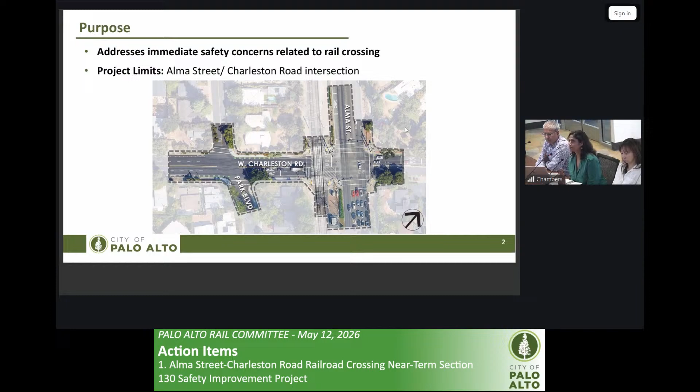To give some background, this project was initiated by the California Public Utilities Commission, CPUC. It was identified as one of the locations where safety improvements were needed, looking at all the different data they have on traffic speed and volume, fatality conditions, and the analysis done by the FRA, the Federal Railroad Administration. It's a program that supports the elimination of hazards at all grade rail crossings throughout the country.

This project involves different stakeholders: Caltrain, the JPB, which operates the Caltrain system in Palo Alto and the peninsula, and Caltrans as our funding partner. The funds are obligated through the State Department of Transportation in California and the City of Palo Alto. This project is limited to the guidelines and requirements proposed by the CPUC.

We have a short timeline of how we started the project - we received the PID, the project initiation documents, from CPUC in January 2023, and we had our Palo Alto Bike Advisory Committee meeting last month, April of 2026. Next slide, please.

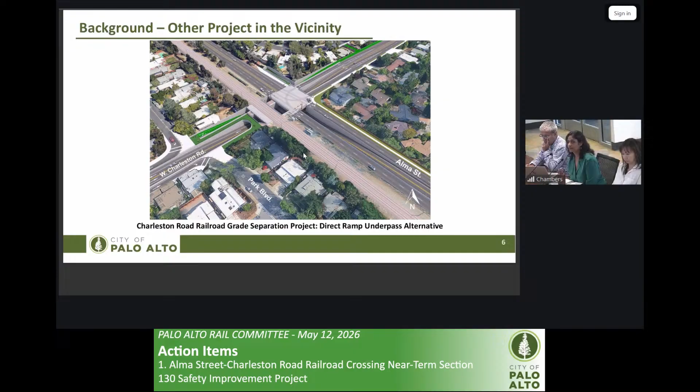This is the proposed direction right now from the City Council and Rail Committee that staff is pursuing further.

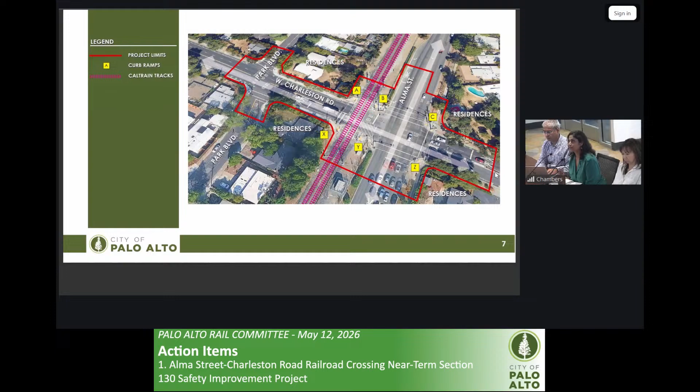In the rush to start the project, I failed to acknowledge my teammates here, Marie Mai from Kimley-Horn Associates, who will be presenting the next few slides on the preliminary concept designs and next steps. We also have Jason E. from BKF Engineers and Rafael Reyes, Senior Engineer from City of Palo Alto Public Works Department. I'll hand it over to Marie.

Thank you, Rishika. Good afternoon, council members. I will be presenting over the next few slides details of the proposed improvements.

So the changes near Park Boulevard are pretty subtle. They include the addition of green bike lane markings at the bike lane entrances to improve awareness of cyclists by motorists. They also include the addition of traffic delineators similar to the existing flexible posts in the median curb.

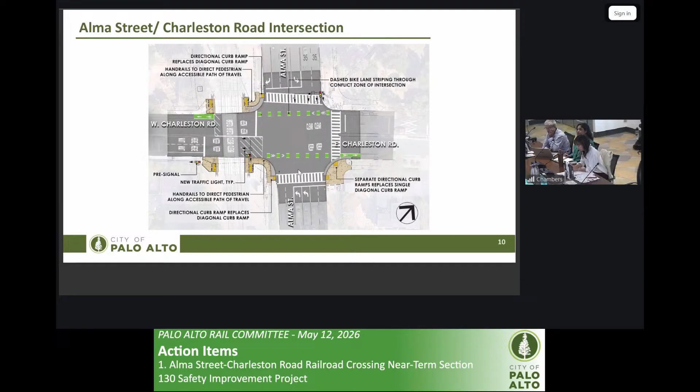I'd like to zoom into the intersection of Charleston Road and the railroad tracks and Alma Street. This slide shows the conceptual plan and summarizes the proposed pedestrian, bicycle, and rail crossing safety improvements.

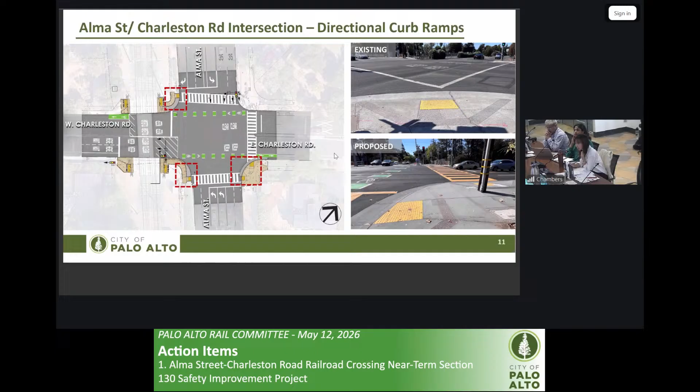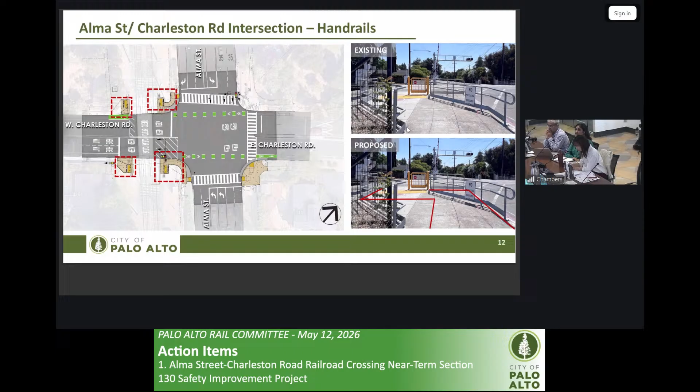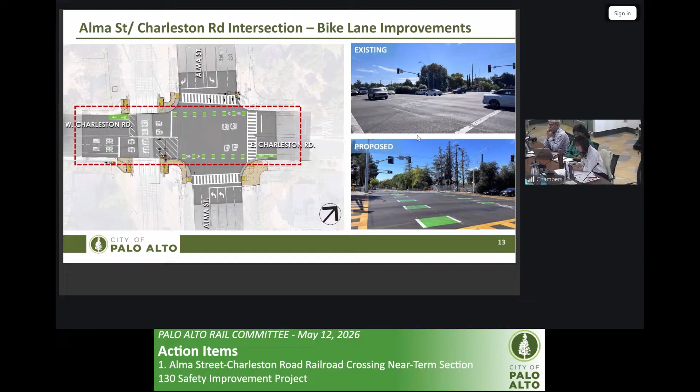There are existing green striped bike lanes along Charleston Road, but they do not currently extend through the intersection, as you can see in the upper photo. The design proposes new dashed green bike lane striping through the Alma Street intersection to make cyclists more visible to motorists in that conflict zone. The bottom photo shows an example of what the dashed green markings would look like, taken from the Churchill-Alma intersection.

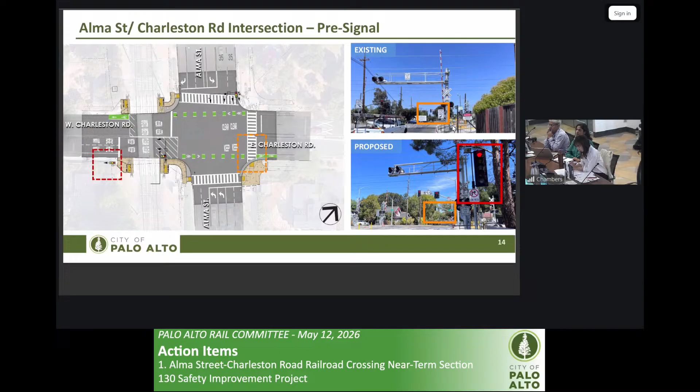The pre-signal is coordinated with the main roadway signal and installed before the railroad tracks, in this case for eastbound Charleston drivers. It improves safety by preventing vehicles from being stranded on the tracks, ensuring that vehicles approaching the rail crossing have adequate time to clear them.

Under normal circumstances, when there are no trains approaching, the signals operate together and show the same signal. So if the traffic signal shows green, the pre-signal, boxed in red, would also show green. The railroad crossing signal, boxed in orange, stays unlit and the gate arms stay in the upright position.

However, when a train approaches, the two signals operate separately. The pre-signal will show red so that motorists approaching the tracks can slow down and stop, and the railroad crossing signal will flash red with the gate arms coming down. The traffic signal would operate separately by showing green, allowing motorists already in the intersection, or too close to safely stop behind the gate arms, to continue through and exit. The intent is to keep the area by the tracks clear of vehicles.

With the addition of the pre-signal, right turns on red will be restricted because there is no current right-turn-only lane. Motorists who want to turn right currently have to wait for a green signal anyway if they are behind a car wanting to go straight, so the delay from the right turn restrictions may not be significant.

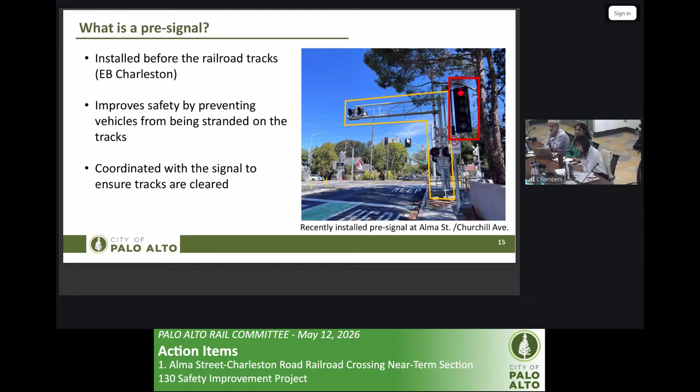As Ruchika mentioned, a number of key tasks and meetings related to project funding and design development have already been completed. The next steps, shown in the dark green boxes, include today's rail committee meeting and a city school traffic safety committee meeting scheduled for next week. These would be followed by city council approval of the design plans by mid-year, development of construction drawings later in the year, and a construction start in 2027.

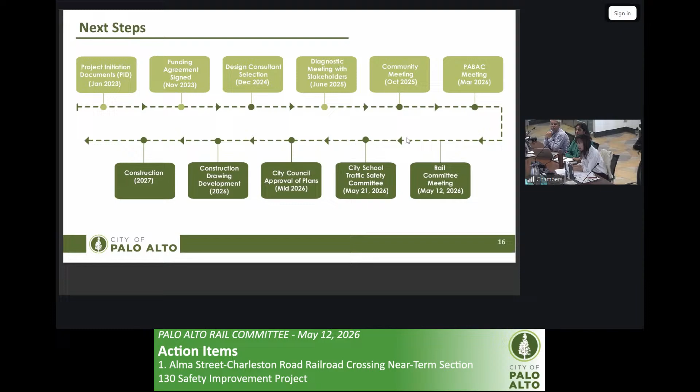That concludes our slideshow presentation. We'd be happy to receive and answer any questions.

Thank you. Shall we go to the public first? Okay, any speakers? If any member of the public would like to speak on item 1, please raise your hand or press star 9 now. We have no request to speak. Okay.

John Melnichuk: With this proposed improvement to Charleston and Alma, which is long overdue, is it duplicative, and will it be wiped out or wasted, expenditures wasted, on the basis of installing quiet zones? That's my first question. And it looks good. We welcome any safety improvements at that intersection, which is very near to my home.

Thank you, colleagues. Julie? Thank you. Yes, Pat, I'll pick up the commenter's question in a way.

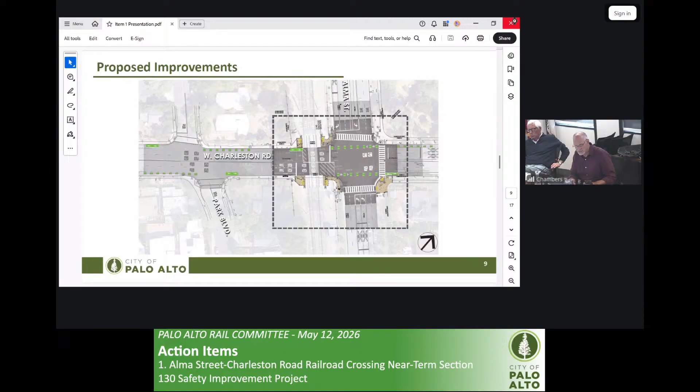Okay, then I want to talk on slide 9, if we can call that up. And the improvements at Park Crossing Charleston - basically we have some improvements on what we'll call east-west bike traffic. But we have a real problem crossing at both Meadow and Charleston, crossing the arterial on bikes going north-south. This doesn't address that at all. Maybe it's outside the scope of this, but is staff looking at that issue? Because it's really a significant problem on our whole park bike boulevard.

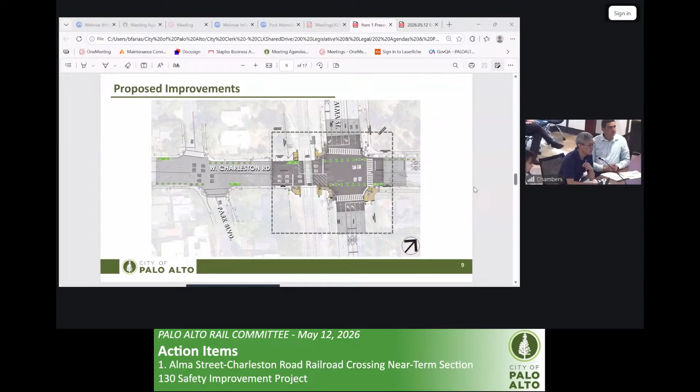Oh, I see we have a staff member who may be able to help us on that. Hello, Council, I'm Jason Yee with BKF Engineers, I helped design the plans. Your comment about Park Boulevard crossing in the north-south direction - with this project specifically, the Section 130 funding is looking to remove queues that may impact the railroad. A crossing so close to the rail could produce similar results to what we've seen before, which is if a bicycle or pedestrian is crossing nearby, that could actually cause a delay in people exiting the tracks.

For example, if you have a large group of bicyclists traveling on Park Boulevard crossing, that could stop traffic in the westbound direction and potentially back up traffic into the crossing. So for that reason, we were sensitive in the design of this. I'll mention though, these were the conceptuals we had. There is a dashed green bike lane through Park Boulevard in the final design to help assist in the east-west direction. Oh, good. Yeah, I was less concerned about the car backup and more concerned about the bike riders, but both matter.

And my recollection is that our bike and pedestrian master plan does address that issue, but I only have a vague recollection of that. It looks like my vague recollection may be the highest at the table. Okay, all right.

And just from a nomenclature standpoint, I've been trying to push this at Caltrain: we don't have good nomenclature. What I think should be is we call safety improvements those that are trying to address accidental risks, and security those that are trying to address deliberate risks. Of course you could argue security is a subset of safety, but we just haven't had nomenclature that says what are we trying to solve here - is it cars and people doing things accidentally, or are we trying to prevent intrusions into the right-of-way to prevent self-harm? If anybody's got good ideas on that, I think there's a need for clear communication on a term everybody understands for which problem we're trying to solve.

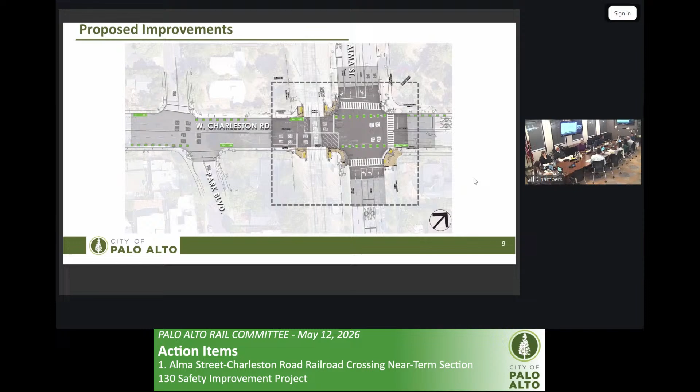I can respond to your previous comment. This is Ria Hutabarat Lo, Chief Transportation Officer. In terms of the bicycle crossing, staff is planning on providing wayfinding at the corner of Park and Mackay, just a little bit upstream. The idea is to encourage cyclists to cross Charleston at Wilkie Way instead of Park Boulevard, and I think that will help alleviate this concern, given the closeness to the crossing. Great, and that seems logical given they end up on Wilkie to get further south. Meadow, which isn't part of our discussion, doesn't have as good an alternative street route, but I'll leave that for another day.

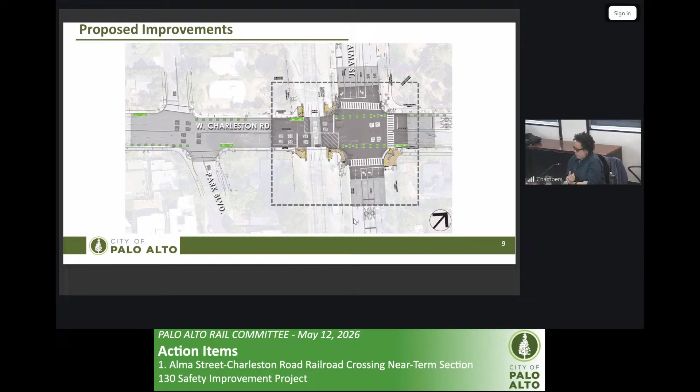Okay, Julie? Yeah, one more thing. Thank you. I know Meadow isn't part of our discussion, and yet if we are going to be contemplating similar improvements at Meadow, the potential vehicular traffic backup there I think might be worse. I don't have the charts memorized, I'm sure Nadia does, but the difference with Meadow is it ends up T-junctioning onto this strange thing on the west side called El Camino Way, which is particularly, on the southern end during school commute time, an incredibly fraught road. The road is one lane with on-street parking, one lane for traffic in each direction, and the bikes are meant to share the road. So I worry about that piece being backed up potentially onto El Camino.

And in this new scenario where cars are really not allowed to advance, one or two at a time with every train signal coming - well, and that issue of signal optimization, whether the new capability hopefully of AI empowerment, even preceding that, Caltrain has had an issue, and I'm not sure they've really optimized it yet, of when gates go down, how long it takes for the whole pattern to recover to normal. During that period cars aren't flowing through in the most optimum way. So I think whether or not we get this AI empowerment, we should really be seeing if Caltrain can support better signal optimization, basically at the Alma and Charleston signal.

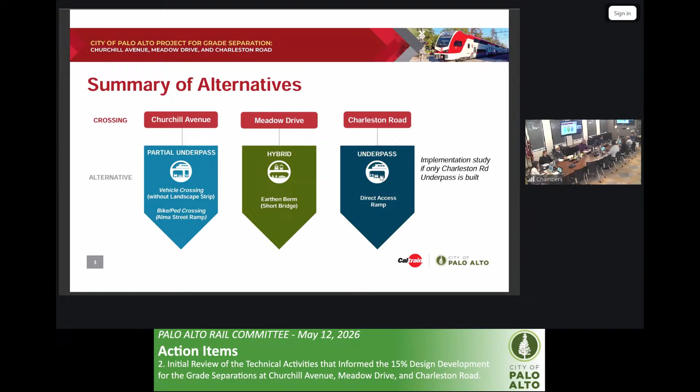I'm going to continue with the summary - recapping quickly where we've been and where we're going. Over the last year, the project developed multiple concepts, several alternatives at each crossing, and at the end of last year, City Council selected one alternative per crossing to further develop into 15% design.

So we are halfway through this 15% design development. Today we're going to give you an update of where we are. Then in September, we're going to present an updated 15% design here to the Rail Committee and also to City Council to receive concurrence to carry forward into the 35% plan development and environmental clearance phase. That 35% phase will run from October 2026 roughly to the end of 2027, where we'll be developing and advancing that 35% design and environmental clearance.

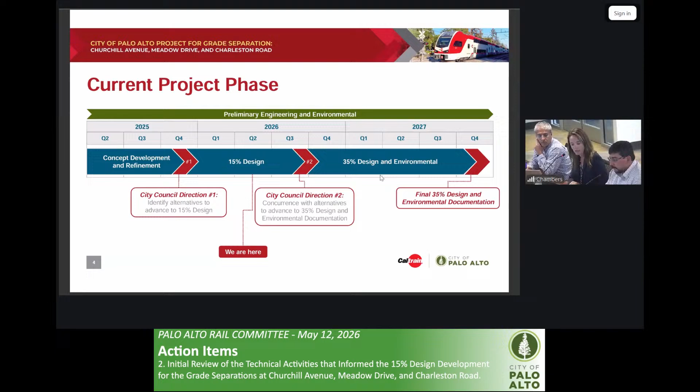Before we launch into our design update, I wanted to summarize what's important: the focus and difference between the 15% design phase and the 35% design and environmental phase. Really the goal for 15% is to establish a feasible, buildable project concept with a defined footprint, which we're going to talk about in the next slide, to inform the environmental studies in the next phase and get an understanding of a preliminary cost and schedule, which Edgar is going to talk about.

It includes updated concepts, layouts, typical sections. If you think about a roadway and you take a knife and slice it down, you would understand the lane configuration, where the shoulders are, and the typical cross section. You will understand key risks and also preliminary cost estimates. The final deliverables would include a basis of design, which is really a summary of the criteria, codes, and standards that would be used for advancing the design.

The 35% design phase is about advancing the design, confirming more details on the track and roadway geometry, the type of structures to be used, a better understanding of risks and constructability, in order to complete the environmental documentation. The deliverables are that 35% design plan set, the environmental documentation, and a refined project cost estimate and schedule.

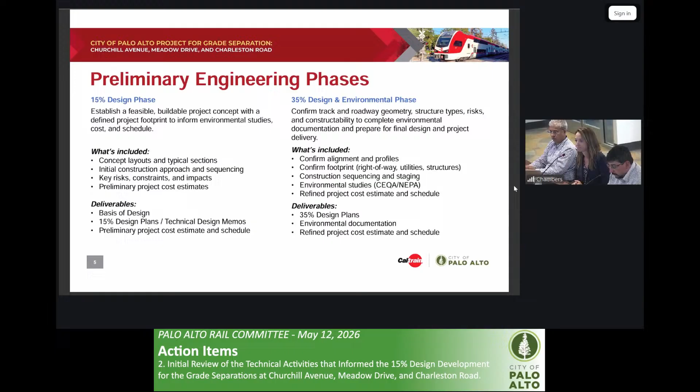As I mentioned, the goal of this 15% design phase, which we've talked about here at the Rail Committee, is establishing a stable project footprint. The project footprint not only consists of the permanent improvements - the bridges, roadways, utilities - but also the temporary space needed to construct the improvements: the shoofly tracks, which Edgar is going to talk about, which are the temporary tracks needed to keep the trains moving during construction, the staging and laydown areas, and the work zones.

When we say stable, what we mean is a high level of confidence that the overall footprint is not going to expand - it's the area we're working within. After this 15% design phase is complete, that's our maximum footprint to work within during the environmental period as we're analyzing potential environmental impacts. Concurrent to these environmental technical studies, we'll be advancing that 35% design. Hopefully that helps set the framework of the 15% design goal of advancing that stable footprint.

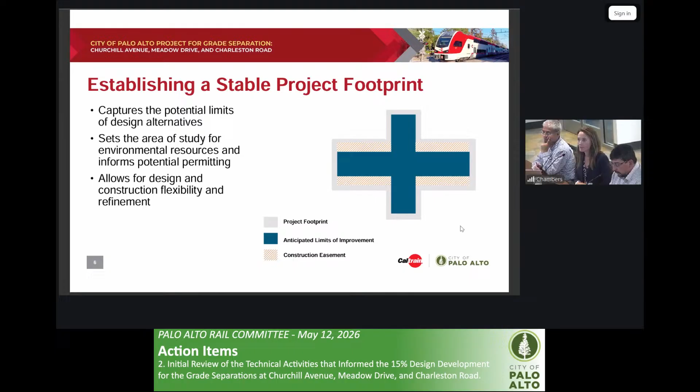Final slide for me to tee up Edgar in terms of the key design elements we're going to cover today, which the team has been exploring to ultimately get to that footprint: roadway, track, the right-of-way, the utilities, the structural components, and the construction considerations that Edgar's going to talk about. Edgar's going to speak to all six of these key design elements.

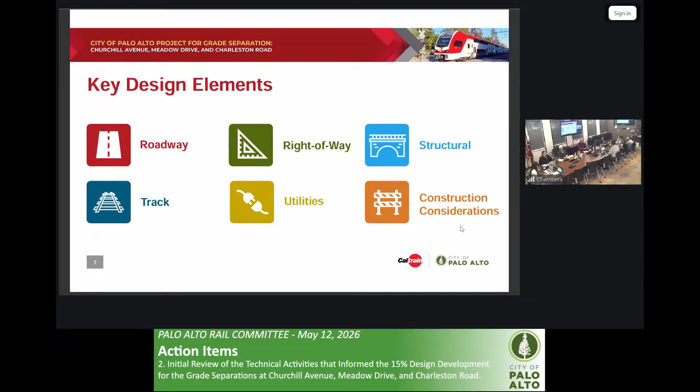Thanks, Jill. Good afternoon, Rail Committee. Let's dive right in, as we've been doing quite a bit of work as part of this 15% design effort to better understand how the design is advanced, how it relates to constructability, and the implications to roadway operations, railroad operations, and the community at large. The first topic is with regards to roadway and drainage.

This is a lot of what people experience on a day-to-day, but the drainage is because when it rains, you do not want that impacting your roadways, whether it's a lowered roadway and avoiding flooding conditions, or simply the ability to travel safely along the roadway because you're trying to clear that water out.

As part of the 15% design drawings, we have started the detailed evaluation of how the water is going to be conveyed from these low points, how to bring them up to a conforming grade, or get back up to a specific elevation to tie to existing storm drainage systems, to then be conveyed to the creeks at either side of these crossings, Matadero Creek and Adobe Creek.

Because all three roadways are being lowered, Churchill, Charleston, and Meadow, there is a need to bring that water up. Water will go to its lowest point and find that space very quickly, so we need to be able to pump that out and get it into the piping system. This is the first stormwater report detailing out that preliminary design to understand how far the stormwater improvements will need to occur for the project at each of the three locations.

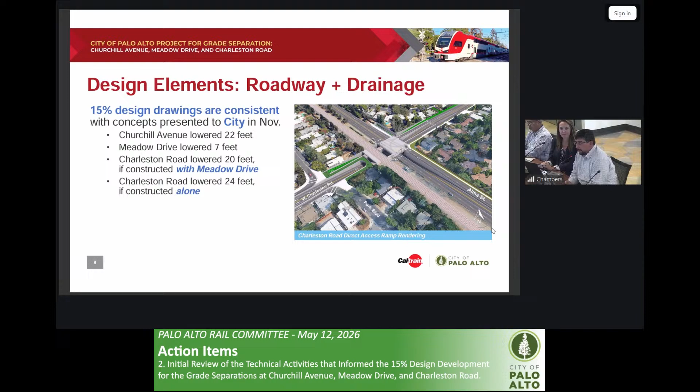With regards to the roadway, as part of the concept refinement, we had done turning movement analysis to test not only fire trucks, but some truck movements as well as trash collection. We did a thorough analysis to confirm that not only local vehicles can make the turning movements, but also at every location we can handle a garbage truck, fire truck, and what we call a standard bus, a 40-foot bus, as well as what's known as a wheelbase 40-foot truck. This allows for larger deliveries, moving trucks, Home Depot deliveries, or materials deliveries that tend to be in larger vehicles, and shows how those vehicles would be able to maneuver through each of the crossings.

There are some limitations, specifically at Charleston Road with regards to the direct access ramp. The predominant movement for the direct access ramp is private vehicles going from the west of the tracks to the south of Charleston, where a great deal of development is already occurring in South Palo Alto. So that direct access ramp is mostly handling local traffic, and we believe there can be a limitation on the 3-axle semi-trailer at the direct access ramp. There are many options for trucks to go onto Charleston, whether it's El Camino to the west or Middlefield to the east, so there are options available for heavier truck traffic if necessary.

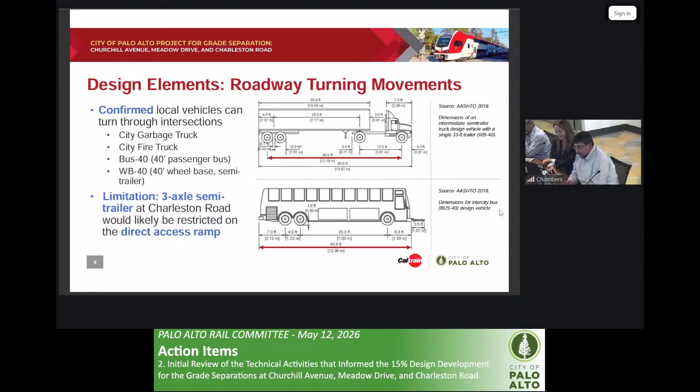With regards to the right-of-way, we have some refinement associated with the right-of-way. I'll come back to the topic of utilities and where potential utility corridors may be. We have seen, at least at Churchill and Meadow, that the 15% design confirms the previous list of potential property impacts and potential acquisitions. With regards to Charleston Road, there have been 2 parcels that were removed from the list based on the 15% design due to potential reconfiguration of the bike ped facilities and the utilities.

The list of potential properties will continue to be refined throughout design. As more detailed utility design occurs, we'll be able to increase or improve the confidence level with regards to the list of potential property impacts.

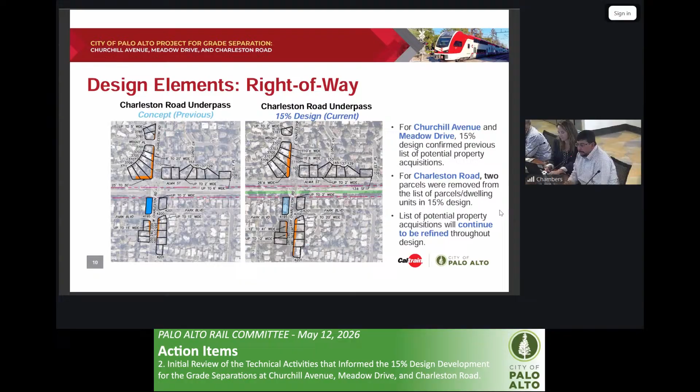And that's the key with regards to the environmental documentation process, it's effectively a disclosure process. So this is, as part of the due diligence, being able to disclose here are the potential property impacts. Next slide.

With regards to structural and geotechnical, at Churchill Avenue at the partial underpass, the roadway is lowered within a concrete box underneath the tracks with cantilevered retaining walls approaching it. I'll get more into detail as to the methodology, but this is where that box is essentially jacked or slid underneath the tracks.

The example on the right is what the box could look like for the Seale Avenue underpass. In this case, the tunnel extends into Peers Park to reduce excessive retaining of soils. It's pushed through from most likely the park side, and that box is then able to be stable underneath the tracks and supported by retaining walls on either side.

I'll get more into the construction method here shortly in terms of the box jacking, but thanks to preliminary geotechnical information, not only what was previously done by the city, we have done additional cores out there and confirmed, at least for 15% design, the bearing strength of the soil, which led to preliminary structural plans. As the project proceeds into later phases, more cores will be necessary. That's because when you're ready to construct, you want to make sure you have precise data for wherever there's going to be any foundation so that you can confirm the design and that there's enough bearing strength at that particular location.

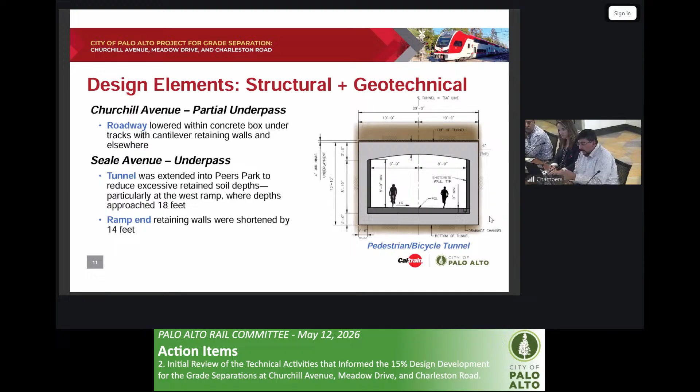So basically the soils confirm that box jacking is possible at this level of design. That is accurate. Now, as to the support of excavation or support of the jacking, those are refinements that will occur as we get more cores at those specific locations.

With regards to utilities, we've done desktop research to identify the major utilities, some of it confirming previous work and others new items that were identified. Further investigation is needed. As part of that desktop research, we also had the owners of the utilities come out and confirm through their mapping where their utilities are. They did not mark them out - that's going to be a subsequent phase. But we have received record drawings from the utility owners, vis-a-vis the city, PG&E, and other fiber communication companies, to be able to confirm what they believe are assets in this area.

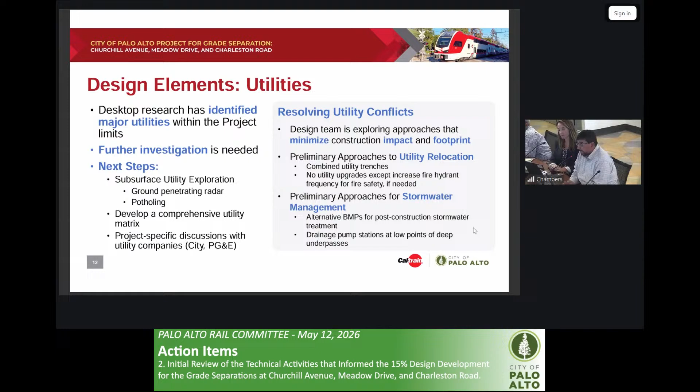At Churchill Avenue, there are no modifications to the track. This is thanks to the working assumption that the improvements will be done through box jacking at that location.

Charleston Road, if delivered on its own—in other words, if there's only sufficient funding for one crossing and Charleston Road is that one crossing—then the recommendation would be to do no modifications to the track and box jack underneath those existing tracks.

If there is sufficient funding, and we'll get a little more into the delivery scenarios, but if there's sufficient funding for Meadow and Charleston Road to occur effectively at the same time, then there's an opportunity to raise the tracks at Charleston Road. This can help alleviate some of the challenges at Meadow and the constructability at Meadow. It raises at Meadow 16 feet, and due to the Meadow Drive track raise, it can increase Charleston Road up to 4.5 feet.

The tracks would be set on bridges over the roadway crossing or a box. We're looking at both options, and I'll explain why there's the opportunity for either—and then embankment with retaining walls for Meadow, which we had presented to the rail committee at previous meetings.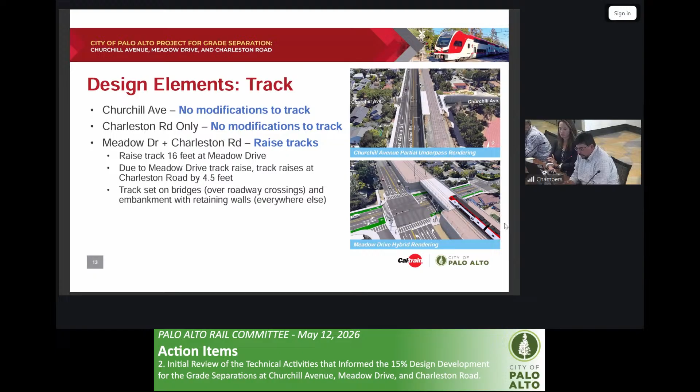Next slide. There was a question at the last meeting about how the track curves would work. There's the ability to move the tracks up, which requires what we call vertical curves—the smooth transition of the train into a new grade. We also have the need for horizontal curves to either create additional space or provide sufficient space for construction.

Those two curve types, horizontal and vertical, should not coincide or overlap. Here in the exhibit on screen, we show at least where the track improvements could occur, and how the vertical curves in orange and the horizontal curves are effectively staggered to provide the space necessary for the tracks to create additional space and then move vertically.

You can see how that translates into the profile itself. Wherever you see green, there's usually a horizontal curve. Where you see orange in the center, you go straight down—that's the bracket for the vertical curve transitioning from one grade to another. We wanted to share with the rail committee how that design came about to get to steeper grades where possible.

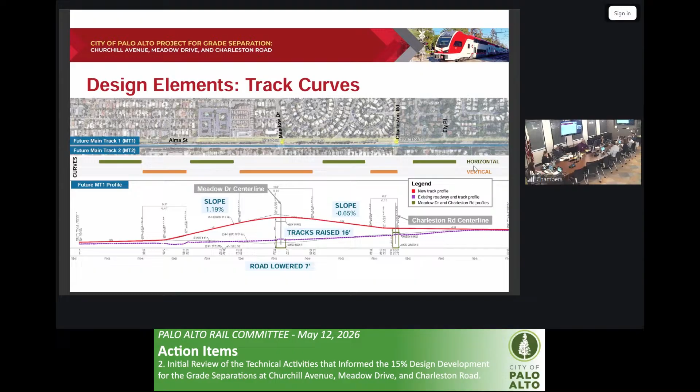To constructability and construction sequence: the construction sequencing is intended to help support and identify the community impacts as part of major construction phases. These things don't happen immediately. It's being able to have deliberate thought as to the space required, the amount of time required, how a contractor is able to mobilize equipment in and out, and materials in and out of the space, to be able to build a set of improvements.

The construction sequencing as part of 15% design will serve as our baseline in informing the environmental document. It is not the construction sequence—it is intended to be a feasible construction sequence to understand those environmental considerations for the environmental document.

The city and Caltrain do have a constructability workshop this month. We continue to work and explore the key constraints associated with the construction sequencing—how each phase of the work could occur, what are going to be the challenges with those phases, and what does that mean in terms of the user experience.

In other words, your cyclists, your schools—Meadow and Charleston being key corridors for school access. So being able to identify for each user what can happen and how to be able to do so safely, because we're talking about major construction equipment, large pieces of materials, and in some cases large girders to be able to install for the future bridge construction.

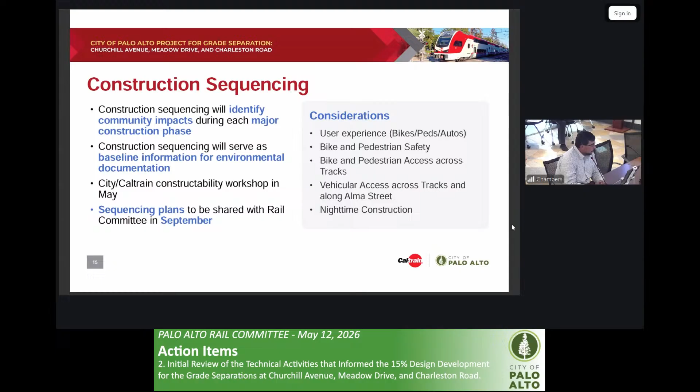There are homes adjacent to these potential construction sites, so nighttime construction is something that is going to be better understood, to be able to say what can and cannot occur at night, to reduce potential noise-generating activities. Next slide.

Let's dive into track shoofly. The best way I can describe it is that it's a track bypass—a potential or temporary track constructed around a potential construction site and work area along an existing track, to be able to build whatever is necessary. In this case, a shoofly is necessary to construct the Meadow hybrid grade separation.

So for the shoofly sequencing, it will allow for reliable and consistent Caltrain operations with larger work windows for the potential contractor, and the opportunity to improve those production rates. When we look at a contractor's space and the amount of time provided, safety is paramount for the rail operations, the neighborhood, and those workers adjacent to the railroad. So those work windows and the ability to provide space are really important—essentially, the more space that's safely provided, the higher those production rates can be.

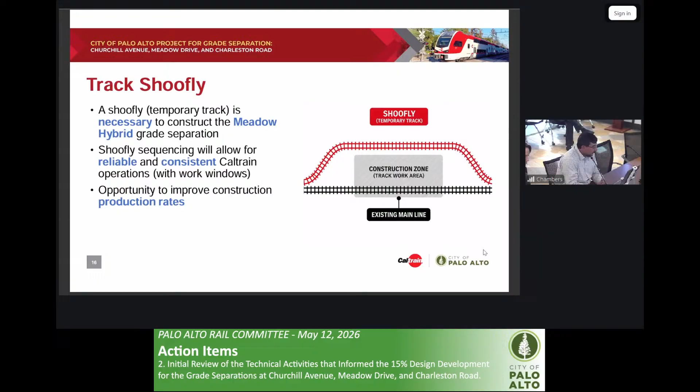So there, we evaluated the shoofly extents for Meadow Drive. And if in this case we wanted to see the larger shoe fly extents, if Meadow and Charleston were to be built at the same time, and see if the shoe fly could be utilized to improve the construction duration for Charleston. So we looked at a shoe fly extent from Green Meadow Way to Loma Verde Avenue, approximately a mile-long shoe fly.

So creating those temporary tracks to one side of the existing tracks. Those existing tracks that are there today are going to be operating with Caltrain trains, so there needs to be some form of separation from those existing tracks to the shoe fly tracks with a temporary barrier and construction fence. The shoe fly tracks could be constructed, then you have the supporting infrastructure for those shoe fly tracks, vis-a-vis the OCS poles and any maintenance assets, and in this case, crossing equipment for Meadow, because Meadow will be open while the shoe fly is in operation.

And so in this case, it shows that there's about 28 feet remaining for Alma after providing the protective barriers for the roadway, the shoe fly, and the existing tracks, as these workers will be in between the tracks and the roadway.

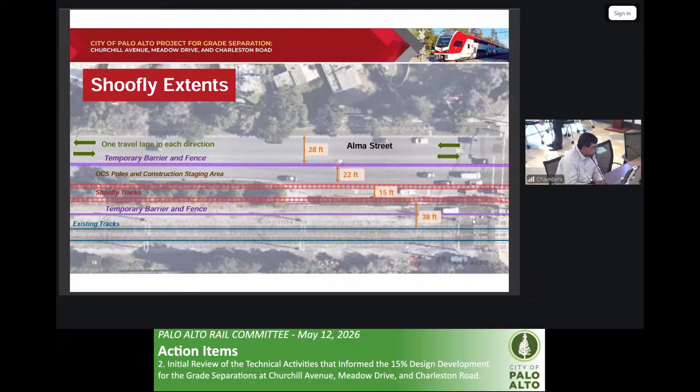Next slide. I think it'd be helpful if you'd say how wide a lane normally is and how much a shoulder is. A typical lane is at least 12 feet, but it can be reduced down to 10. For fire access, the preferred is 14 feet along a stretch. And so this is what we've been able to at least accommodate.

In section, one thing is to be able to see it in plan view from a bird's eye, it's another thing to be able to see it in section. So I'm going to go right to left. The existing tracks are on the right side, then you see the shoe fly tracks in the center, and finally Alma Street on the far left. Then you'll see the sidewalk and the remaining roadway right-of-way to the left of that. The shoofly can extend into Alma Street approximately 23 to 37 feet.

Now, it seems like that's a very wide range. It's because of the jog in the right-of-way and the transition of Alma's right-of-way width between essentially the north and south side of Meadow. So that's the reason why there's a larger extent there.

So this is to show, again, what may seem like a lot of space when you go out at the crossing and look at the railroad. It's actually not as much when you start looking at the ability to construct said tracks. And the east side of Alma has a very wide planting strip, as well as in some cases a buffer even beyond the sidewalk to the back fences.

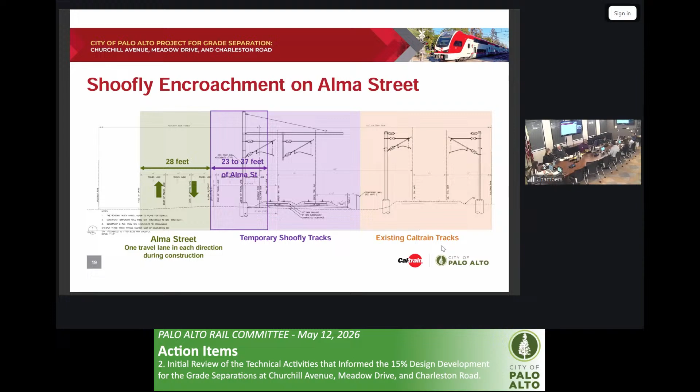Thanks. All right, so that's in section. Next slide. So box jacking. This is applicable to Churchill Avenue, the partial underpass, and then Charleston Road if it were to be constructed with or without Meadow. So there's several scenarios. So what occurs here?

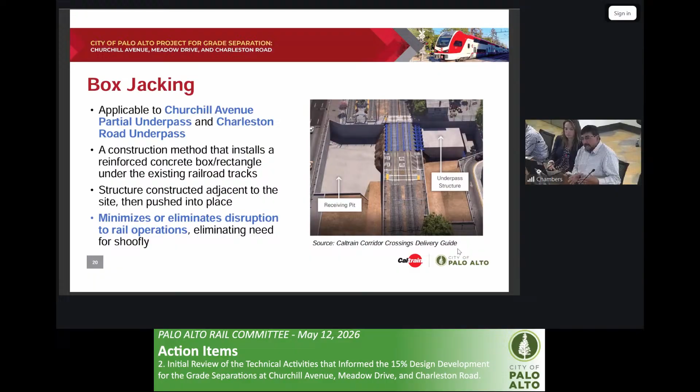There is another jacking method we are exploring, which is what other railroads have done. This type of box jacking isolates the tracks. We're exploring the ability to have some form of shutdown, cut the tracks, dig the hole, and push the entire box with the bridge structure underneath into place. That's been done on Long Island Railroad as part of a handful of pre-planned closures. That's another method we'll be exploring as part of this project.

There are some wonderful time-lapse videos on box jacking on our website that we can link for the public, because until you've seen that, it's hard to envision how this works. In this case, there's a whole box, and the ability to jack not only the box with an open cut, which makes it a little easier and less isolating of the tracks, but also to build essentially a frame of the box with a bridge on top and push that into place. So we are exploring different methods to reduce the construction period at the crossing and improve constructability and construction timelines.

Even though we haven't done any rail jack boxes regionally, VTA has used it on other locations on projects they've done in the county, as our CEO mentioned. Where the tracks are isolated, it minimizes or eliminates the disruption to rail operation, so you can effectively operate on top of the tracks. If a closure is considered, there are other ways to reduce the impacts surrounding that crossing. We are exploring multiple options, including whether it's one large box or two smaller boxes, and starting to delve into those design considerations and details to improve constructability for each crossing.

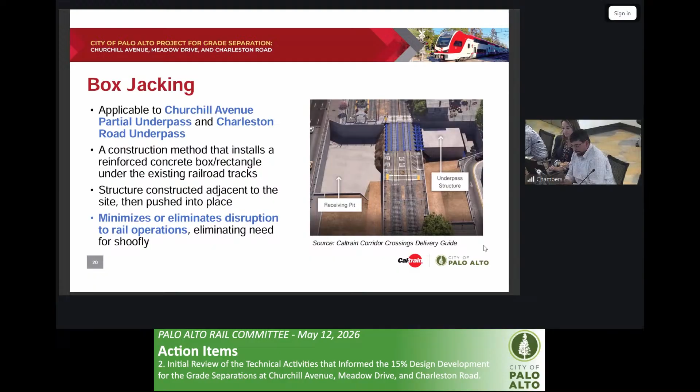So the delivery scenarios. We've talked about a lot of the design elements and constructability, and we'll go into more detail in the coming months with you; this is the first foray into that. For Churchill Avenue, I've mentioned this box jacking, both for the vehicular crossing at Churchill itself and Seale Avenue at Peers Park, the ability to build and push that box through. I didn't get too much into Seale Avenue today, but we will be talking about what it means to potentially push that box further into Alma, maybe doing some open cut there, and some of that sequencing to improve constructability.

Now, Meadow and Charleston — as we've communicated in the past, this is highly dependent on the amount of funding available for the crossings. So we are preparing these scenarios to see how much it would cost to do Charleston on its own, Charleston and Meadow somewhat in sequence at the same time, and then both effectively at the same time, so we can better understand the trade-offs from a cost perspective and present that to the Rail Committee and the City Council. Charleston Road, essentially it's box jacking — from a scenario perspective it's pretty straightforward, and we consider that a good baseline to understand the marginal cost beyond that.

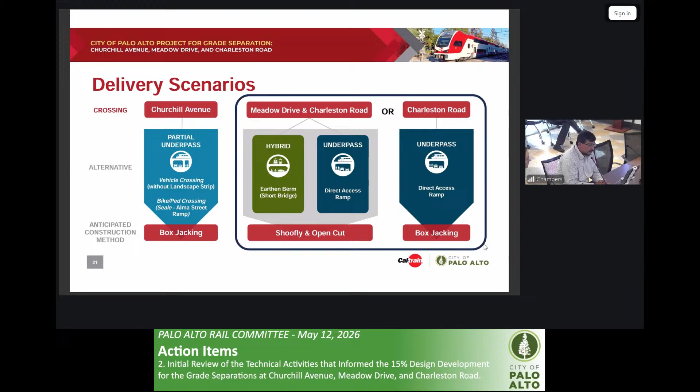Construction techniques for that, what if any diversion of traffic may be necessary? Is shutting down Alma there an option? Unlikely, but we're trying to see how to provide that space to build what is effectively a pretty big bridge, an 80-foot bridge at least. So there's some complex geometry and structural calculations for that particular bridge.

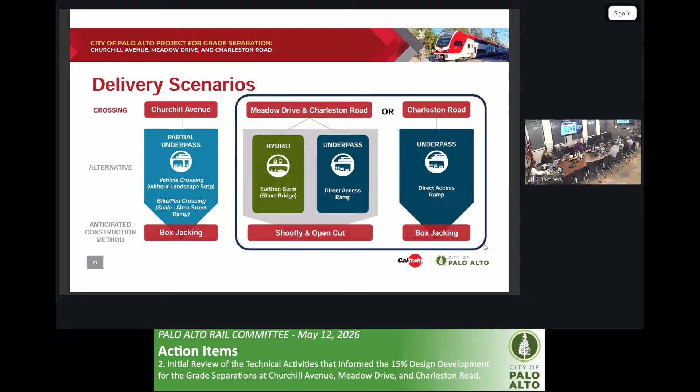Oh, sorry, I do have one more slide. The independent cost estimates and the considerations associated with that.

The estimates will include total delivery costs. I can't emphasize the importance of that. It's not just construction, it's the ability to deliver all of it: utility relocations, permitting, environmental monitoring, construction management, noise monitoring. All of that is to be included as part of the independent cost estimate. Property acquisitions are not going to be explicitly included in the ICE. However, we will be able to come back with some preliminary estimates associated with potential property acquisitions.

The estimate will be informed by three key factors. First, the work windows and rail service constraints, the ability for the contractor to perform the work. They will be estimating whether production rates will be freeform, meaning unconstrained, versus a level of constraint or degradation of those production rates. We are in an electrified corridor, so there's the need to de-energize the OCS to provide that safe space for contractors, crews, and equipment. Sometimes with larger equipment you need clearance from that active or energized OCS wire.

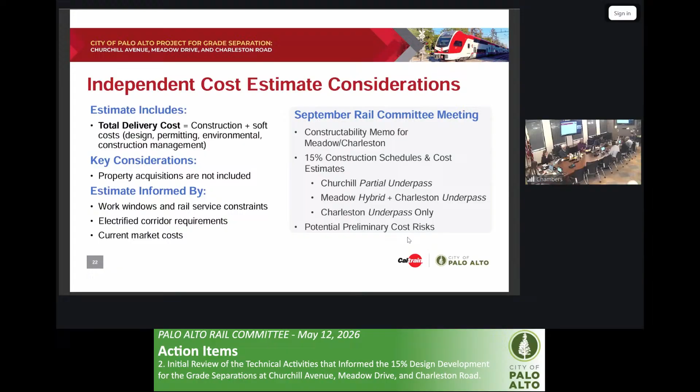So if I could just touch on August, the last slide. In August, we're anticipating hosting 2 community meetings at Mitchell Park, dates to be determined, but working closely with the city's comm team and others, late August. We'll socialize that date once we have it.

And then, as Edgar said, coming back in September to Rail Committee, and then ultimately to City Council for concurrence to advance into 35% design. That concludes our presentation. Thanks.

Well, first, I just want to say thanks for once again presenting some complex issues in depth and yet in ways that allow lay people to understand. And also thanks for indulging our questions as you went through the slides, because it just helps us be able to keep track. Do we have any members of the public who want to speak on this?

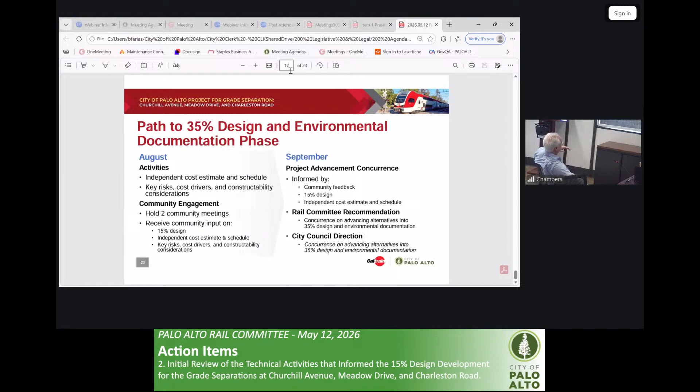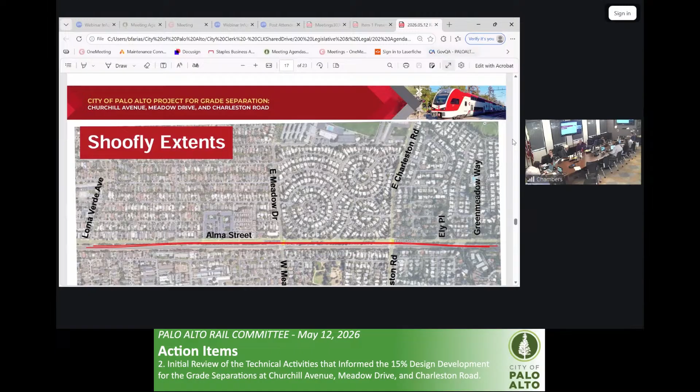Can we go back to slide 17? Please, is that possible? So for me, I live very near to the railway. And I'm just living here, just there.

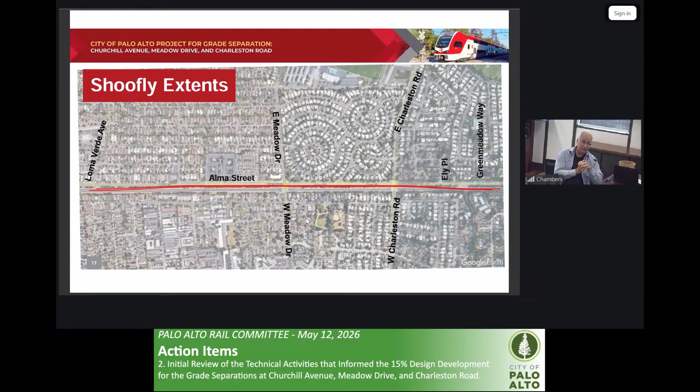I have concerns about long construction disruptions, nighttime noise. We suffered a lot with electrification and the positive train control systems, where we didn't sleep for years on end, from flashing lights, backup beeping horns from backup of heavy vehicles.

That was, we didn't sleep for many years because of that. Now with the new electrification, we see that there's a lot more noise. There's a lot of rail screech that replaced the rumble of the old diesel electrics. When the trains move faster, they kick up more dust. Our house is full of dust now, rather than diesel particulates. So it's better, but it was a trade-off.

With the horizontal adjustments, is there a way to mitigate rail to wheel screech? Because the frequency, it's like a dentist drill in a certain way. It's unpleasant as that.

And I'm asking for a pretty good holistic analysis of impacts to residents during construction. What mitigations would be provided to us, or compensation for the disruption? Would we be rehoused somewhere else if we can't sleep?

And my last question would be, find it, I guess. I want to thank you for the presentation again. It was a really terrific thing. I learned a lot today.

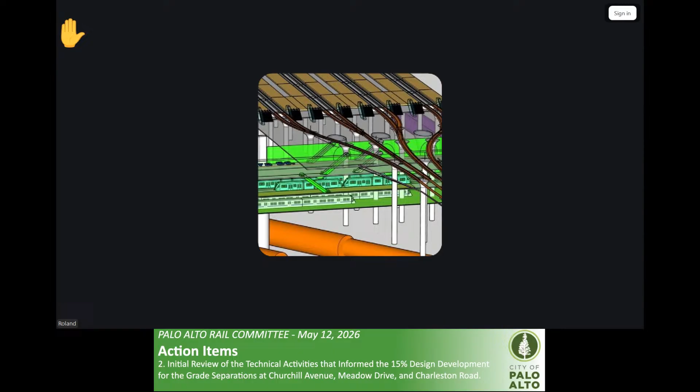I'd be happy to introduce you to people who not only have designed this, but have actually built this, and you may find that the costs are competitive. And my closing comment is about this box jacking, which quite frankly, you have to be honest, it is not viable in your consideration, in your particular configuration, because you don't have the depth.

And the way this is done in the UK is through a 3-day weekend closure. Let's say, for the sake of argument, Thanksgiving, or maybe Christmas, but Christmas is not desirable. And essentially what you do is you take everything down, the tracks and everything, you jack the precast structure into place. In the UK, I got an example, they use a self-propelled modular transporter, SPMT, and this thing weighed, I think, like 250 tons, something like that. And move it into place, and then you rebuild everything. This literally can be done in 3 days if you know what you're doing. Thank you.

Okay, all right, thanks. Ed? Yeah, with all sincere humility, I would say some of the committee members are now up to speed on full physics. I tried to avoid that class in high school and ever since. But I think the presentation was fantastic, just speaking from one audience member.

But the thing that keeps troubling me from when I read it, going through this, is when we talk about Meadow and Charleston delivered together, I'm just trying to figure out how that can possibly work. I understand where we are on 15%, shoofly, et cetera. But you come down to saying things like, where feasible, either Charleston or Meadow would remain open to traffic. That to me sounds like a confusion, disaster, unless it was like these 2 weeks or this month. I mean it couldn't be every other day. So I guess I'd like, not necessarily today, but sort of more detail on that. And I'm just wondering if we're sort of biting off more than we can chew there, and just say, look, it's got to be one. One will be closed for a year and a half.